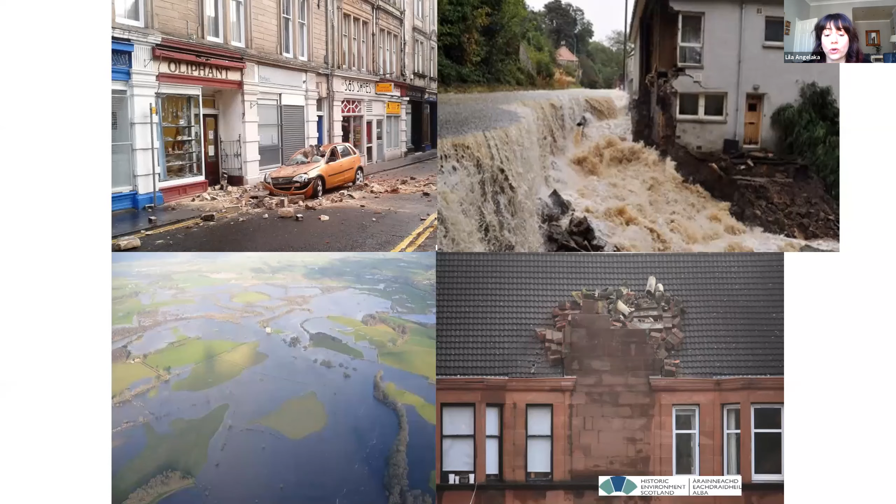In January 2012, there was the highest recorded winds ever in many parts of Scotland. So there is an increasing risk of flooding, caused by storm surges. In some areas there is landslide. So buildings are under threat from coastal erosion and sea level rise, but we're not going to cover this today. However, there is more surface runoff, which is resulting in high moisture levels in external walls or adjacent areas. And that moisture from soils can contaminate porous stone with damaging salts, which can cause decay or accelerate stone decay.

So if we look at the impact on traditional buildings, most of these buildings were actually designed to deal with this weather, and in Scotland, it's quite a harsh climate. So although some of these buildings have functioned perfectly for a long time, with the changing climate, they may not be able to function in the same way. So these buildings may need to be adapted to ensure their long-term survival. And here you can see some of the effects that climate change is causing to these buildings.

It's saturation of masonry and the leaching of lime, which causes instability. And internally, you have higher internal humidity. You have increased growth of algae and vegetation. And again, all of these things, with the ground shrinkage in summer, can cause instability of the soil and the building.

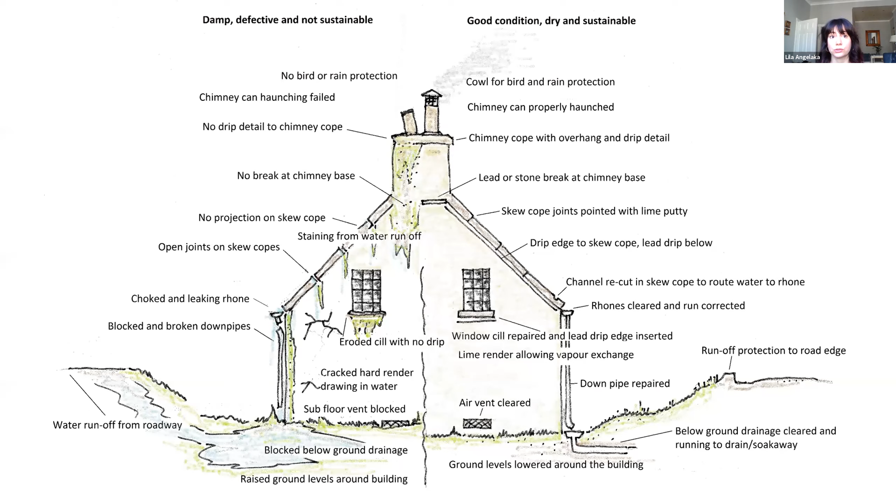Here's a slide we always show in our presentations, just to show basically what maintenance is like, and that maintenance has to come first before thinking about adaptation or doing anything further to the building. The materials we're using in traditional construction, so stone, lime, timber, are quite enduring and are effective in traditional construction, but provided that the building is maintained. Often there is poor maintenance or a backlog of repairs with incorrect materials, poor appreciation of detailing. There's also the difficulty in working heights. So all of these things basically leave the building quite vulnerable to severe weather.

So if we zoom in on the wall, sort of at the micro scale, what does that mean for a building? We're talking about extreme weather events, we're talking about increased precipitation. When older buildings are subjected to high moisture loads through persistent and constant heavy or driving rain, the masonry can get saturated. Damp walls can lead to the leaching of lime, the binder from the wall, which causes instability of the wall, and then the stones can be dislodged. You can see in that nice drawing how the wall basically bulges out.

In addition to this, when you have incompatible materials such as cement renders or hard renders and impervious paints used externally or internally, this can disrupt the necessary movement of moisture going through the wall to dry out. So internally, you have higher relative humidity levels, which can lead to timber decay of the joists, but also of the linings. With additional measures such as insulation and vapor barriers, or blocking natural ventilation, you hinder the drying process, and poor ventilation increases the risk of condensation. So there's risk of mold growth and further timber decay.

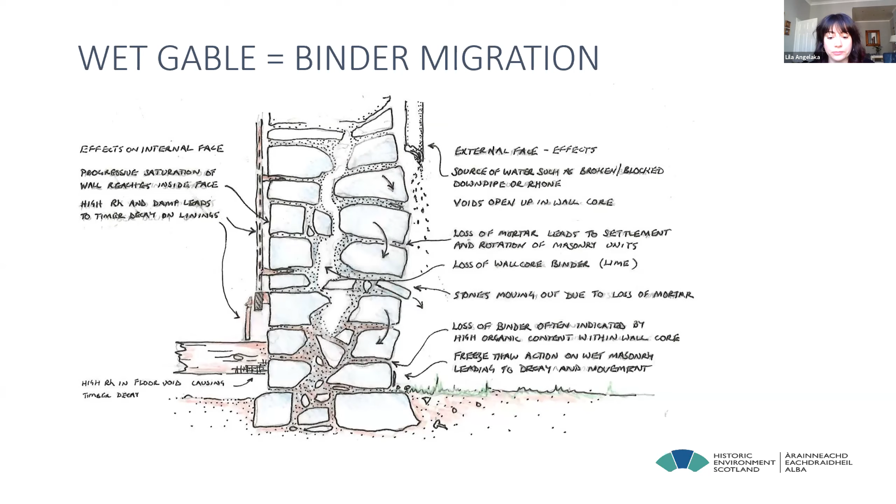So what to do when we're thinking about upgrades? The first thing is to reinstate traditional finishes and also the weather detailing. Generally the focus in today's society and our response to climate change is carbon reduction in housing. So especially older buildings, the ones built before 1919, are considered hard to treat. But in fact, many of these buildings have substantial solid masonry walls, so they actually perform better in terms of energy performance than what we think. With moderate adaptation, they can be considerably improved to have increased energy efficiency to acceptable levels.

So whilst these buildings are, as I said, quite well built, they may need to be adapted to cope with the changing climate, and you may need to adapt their traditional details, or you may need to introduce new ones. But if you do go down that road, these details and materials need to be compatible with the building and match its character. Obviously it's a case-by-case approach. And if your building is listed, or in a conservation area, or a World Heritage Site, you need to think about what that means and the implications in designations.

So I will basically go from top to bottom of the building. I've packed in quite a lot, so apologies, but even if you keep something from all that, that's still quite good.

So chimneys, to start from the top, they're the most exposed element in the building and are quite hard to access. But you do need to check their cans and haunching, the copes and overhang drip. The masonry will be degraded because it's the most exposed element, so you will need to check the mortar joints, and either the stone or brick may need rebuilding. If you do need to rebuild, you need to think of correct materials and correct detailing, having a drip mold if there isn't one.

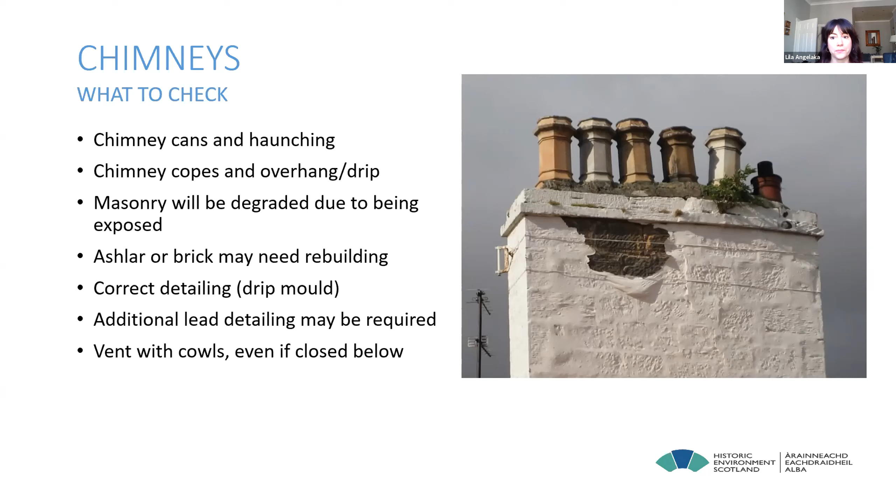If you do need to adapt it, you can use lead to cloak it. And always vent with cowls, even if the fireplace or the flue is closed below, especially if we're talking about tenements where there's a lot of things happening there.

Moving on to skew copes and tabling. This is often a neglected area, and unfortunately also a point of weakness for water penetration. Dampness in gable walls is most commonly due to a combination of factors: defects in chimneys, skews, pointing, and frequently blocked rhones and downpipes. Cement pointing or renders can exacerbate the problem, as cement is vulnerable to cracking, which allows water to come into the building and become trapped.

So you need to look at string courses. You see in that image there's something that looks like a bulge out. It's not a string course, but it's something like that. So you need to check all those details, what there is, if you do need to do anything else.

If there is an overhang, the gables or skews project slightly. If there isn't one and that gable is exposed, you will need to think about redesigning it, or you can put lead underneath following that line of the skew, sort of a string course. Some buildings have skew putts, which you can see in that image, to drive the water away, and also cuts and channels.

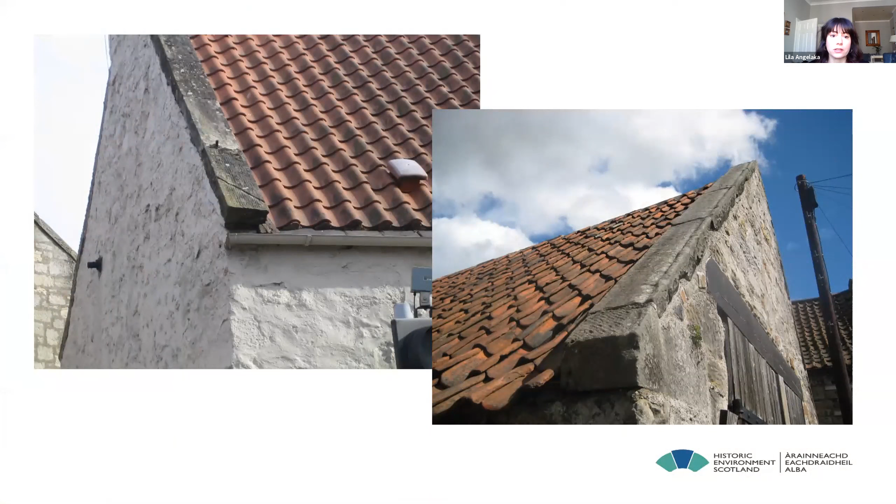Here is the detail I mentioned about the channel cut. You can see on the image to the left the diagonally cut line, meant to direct the water to the slates or to the middle of the next slate or tile, and into the gutter and away from the building. The image to the right has no skew putt, nothing, and is more vulnerable to weather effects.

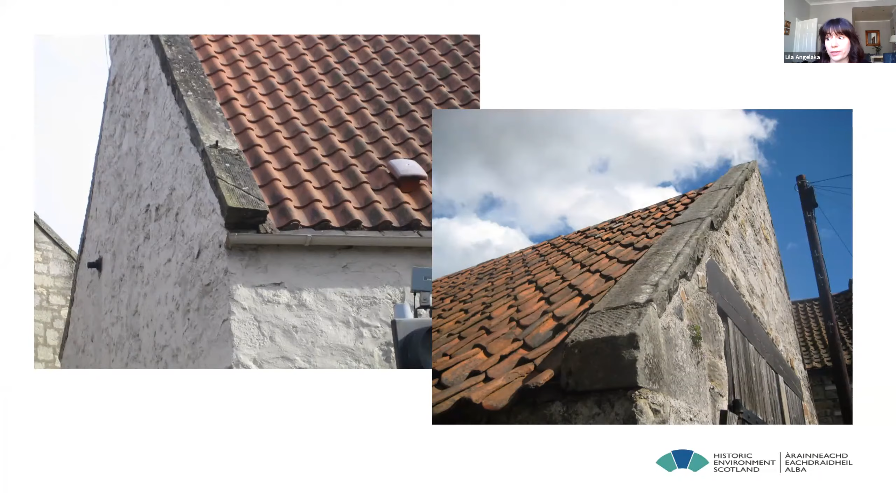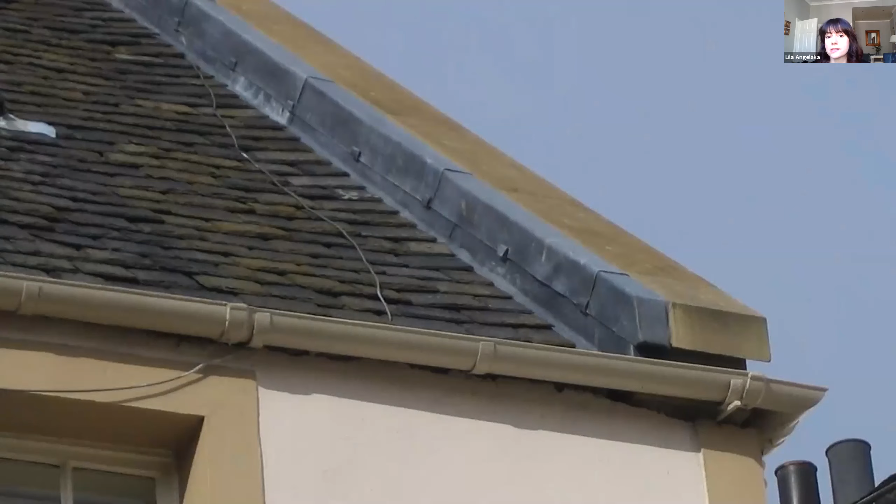This is a halfway approach, kind of between cloaking the whole skew with lead. It's called a secret gutter and half cloaking. A funny story here is lately I've seen quite a few emails and cases in Edinburgh in the New Town where this approach is taken or proposed by roofing contractors. But when the lead turns and goes onto the slates or tiles, it just sits on top of them. It's not secure, so that is not appropriate for use in buildings. It's a very short-term measure because it's going to be easily lifted by the wind.

So as we're talking about roofs, I can talk a little bit about slating. You need to think about whether your slates are appropriate and working okay, and if the laps are correct, or if there are suggestions that they're not. If there is an underlay already and there are mold or damp issues, you need to think about introducing airflow to your roof. Also, in exposed areas or areas of high wind, you need to check fastening, securing the slates with additional cheek nailing every 4th or 6th course. You also need to think about the minimum slate size if you're redressing the slates.

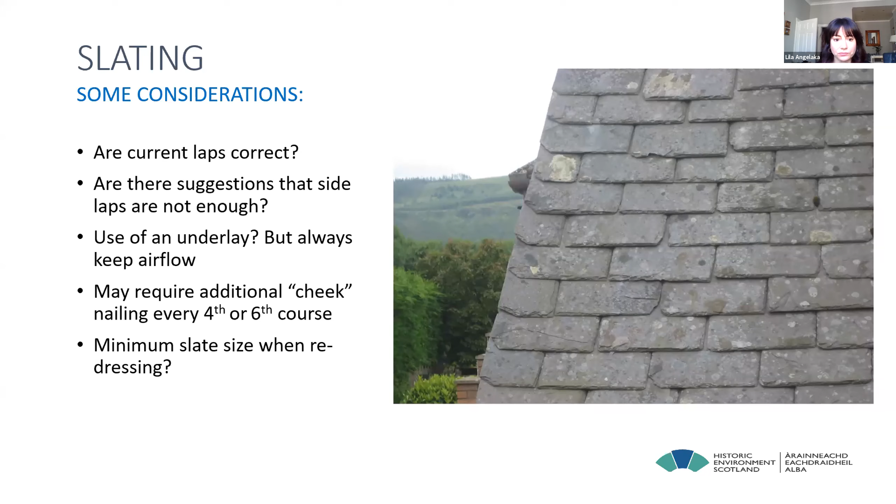So this is a zoomed in image of a roof and shows you how a roof with a water gate, or secret gutter, is done. This is an additional feature for larger volumes of water. Basically you have a lead channel or lead gutter formed at the eaves and then raggled into the skews. The lead goes under the skews, and then slates are dressed over. This is quite durable - it's expensive, but it's a durable approach.

A lot of buildings also have mortar fillets or lead skews, and typically the junction is finished with a weak cement mortar and a lead soaker underneath. This is also an acceptable approach. But anything you do like that, make sure it's fixed properly.

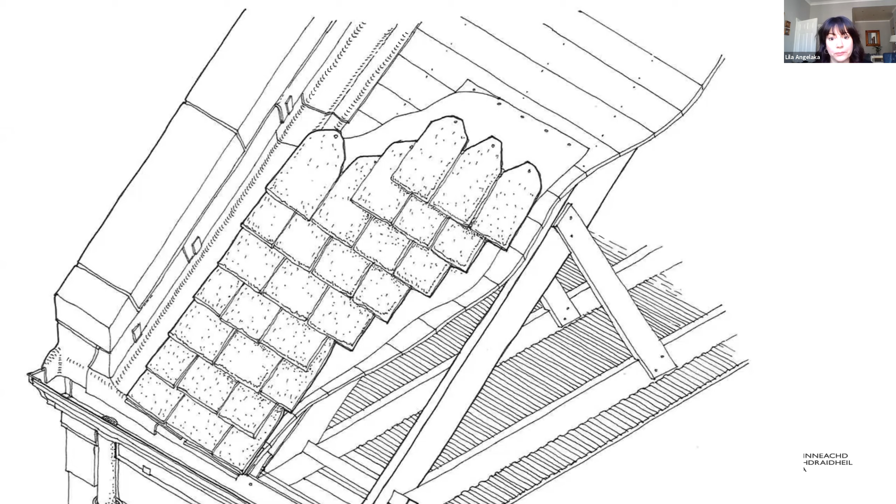And we shouldn't forget about rainwater goods. These should be checked regularly, ideally twice a year, but the reality is that, especially in tenements, that's not very easy to do because of the height. So you should check gutters and downpipes. There's vulnerability to blockages, especially because throughout the years they tend to become smaller. So you may need to replace them with appropriate ones, or think about having wider gutters if they're not coping with the changing climate.

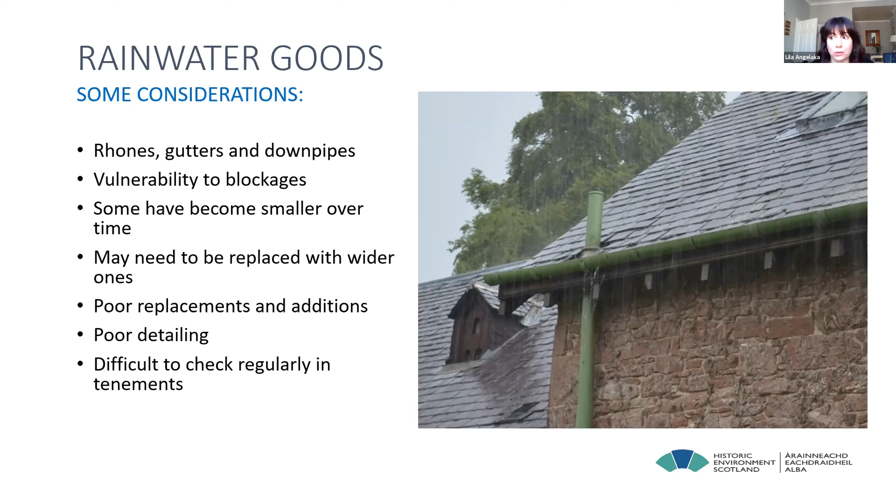Again, there's often poor replacement and additions with poor detailing and connections. Also think about that warmer temperatures and wetter winters, the combination of that may result in increased vegetation growth with potential to block the rainwater goods. This image shows one of these bad connections and bad detailing, and you see all the algae that it has caused to the stonework.

Moving on to the walls. Well, chimneys and skew copes are the things that are most exposed. Walls also matter - even well-maintained masonry walls with good detailing may need additional protection from driving rain. Traditionally, people knew this and understood it. So rubble masonry was commonly protected by a layer of lime harling and a finished coat of lime wash. Rubble work by its nature consists of a high proportion of exposed joints. It's a larger surface, so it was often used on side or rear elevations or in buildings of lower status.

And then these buildings were protected by a lime harl or lime wash. Hard cement-based renders, which used to be a bit more frequent than we would have liked, don't help with water retention, whereas traditional lime, by contrast, is well suited to provide the additional protection you need from wind-driven rain, but it's also quite flexible, so it works better with the building and reduces the instance of hairline cracking. It works with the building when the building is moving for any reason, while the open pore structure of lime harling allows water vapor dispersal and prevents moisture buildup in a masonry wall.

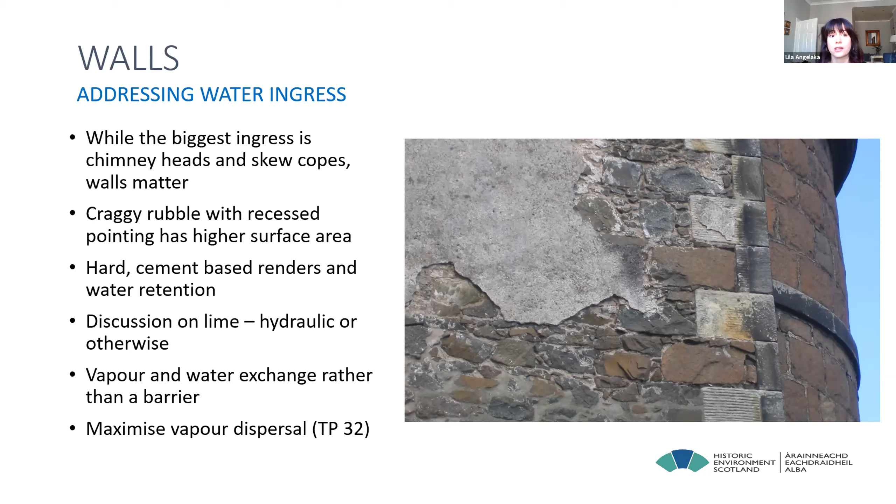So moving on to the walls, basically, historic evidence shows that most buildings were actually covered with a lime harl and a lime wash. Reinstatement of external coatings has proven to be an effective approach in managing the effects of wind-driven rain, even in exposed locations. We have actually done a refurbishment case study of a building in Shetland, which was quite exposed. Traditionally, it wouldn't have had any harling, but there were ongoing issues, so we introduced the harling, and so far it's performing well. That's another thing to think about.

And when you are doing this, you also need to think about - it's an opportunity to think about external wall insulation that you wouldn't have had in other cases.

And again, we shouldn't forget about other kinds of detailing. Often parapets and cornices are considered architectural details, but they're not just that - they're highly functioning elements of a building, so their role is not fully appreciated. The highest part of the building, parapets are one of the most exposed elements, and in areas of high exposure, you may need to think about remodeling these parapets. You can see here how the rain is driven onto parapets, sills and cornices.

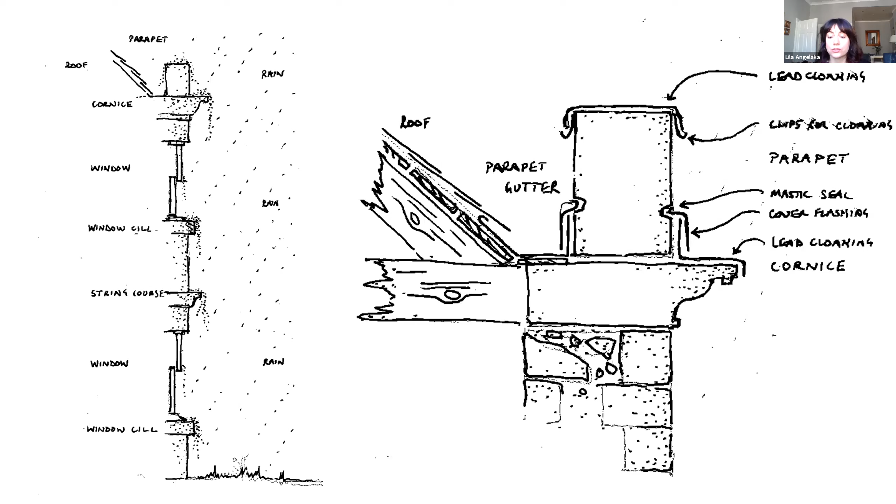Below ground drainage, that's another long topic, but I'm just going to roll through it. So as rainfall levels increase, solid ground floors may be vulnerable to wetting, and raised water tables, water runoff from adjacent areas, and splashback of water onto the building. All these can cause problems.

But the drainage itself also should be adequately managed to ensure that water is running effectively and being dispersed away from the structure, for example through the formation of gullies or drainage pipes below ground.

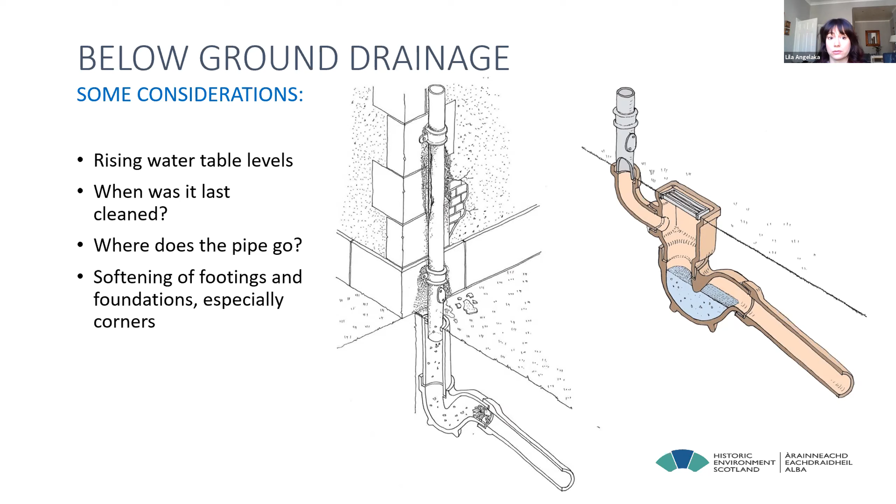Methods such as tanking are not really advisable, because they usually lead to trapping the moisture in the structure, and then it moves up to the walls.

Now, internally, what does it all mean? Basically, with the changing climatic conditions and the high precipitation and saturation of walls, this results in higher levels of moisture in the air and inside the building.

So there's a greater risk of condensation, which can give rise to mold, timber decay, and insect attack to structural timbers, but also to your furniture and your walls, depending on how bad it is.

Measures designed to address energy efficiency, like insulation, sometimes cause too much airtightness. And increased airtightness is linked to elevated levels of CO2 and other pollutants, which has a detrimental effect on the occupant's health, but also the health of the building.

So you need to think about the conditions you have in your building, and one of the best things to do is to have adequate ventilation, to air your space, but also background warmth. The combination of that helps a lot with those issues, but also buffers internal conditions.

With the right finishes—in areas, for example, where you have minor moisture ingress—if you use the correct internal lime plaster applied directly onto the existing masonry and finished with a breathable coating such as limewash or clay paint, that actually helps a lot.

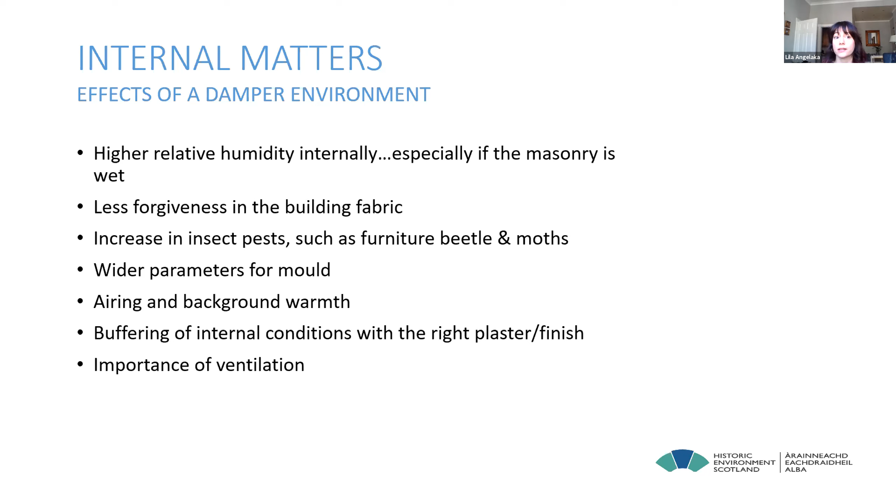Modern stain blocking or mold resistant paints don't really work. They can inhibit the passage of moisture and should not be used in areas of high moisture load.

Somewhere between drainage and ground levels, when you're thinking about ventilation, you need to make sure what's happening also at the lower level.

So any ground levels should be checked, and if they have been raised over time, they need to be lowered if that is the case. You also need to make sure that all your vents are free and unobstructed, and that the air is flowing into your building as it should be.

Also, often things such as pavements and hard landscaping that are butting against a traditional building have not been detailed properly, and that causes issues to the building.

All of those things are basically written in our adaptation guide, which is the short guide 11 that you see, the red one.

To summarize, there are three things to think about: keep your building well maintained and in a good state of repair; you may need to reinstate traditional detailing or enhance your building with new detailing that matches the character of the building; and you may need to improve surface drainage around your building.

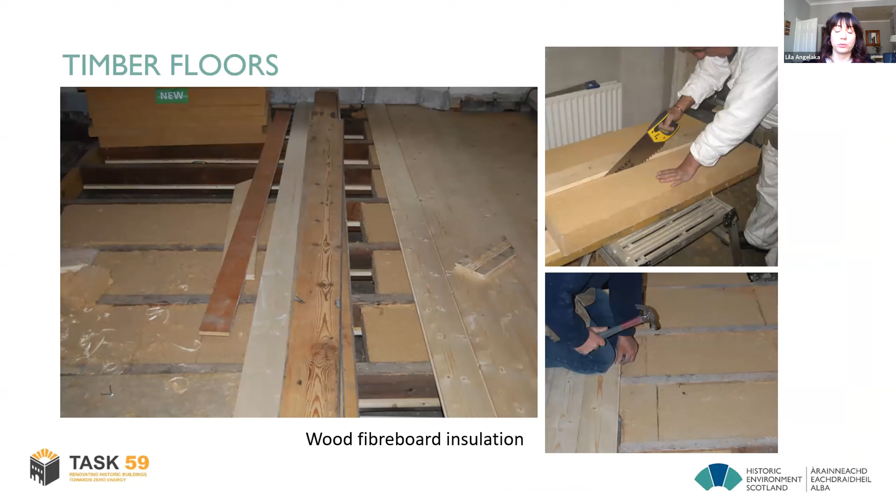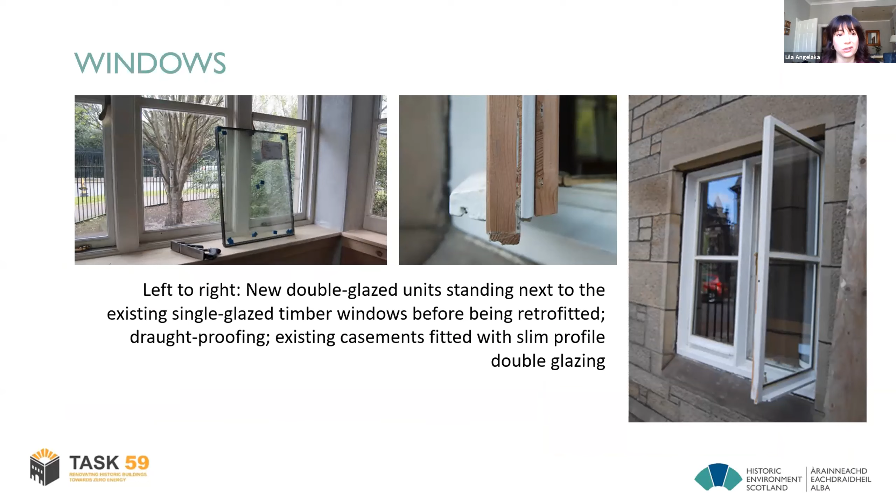So there were a lot of repairs from the 80s and 90s. We stripped some of them out, tried to reuse anything we could. We insulated the floors with wood fiber board insulation, which is a breathable material. We used new double glazed units fitted into the existing timber windows because they were of good quality. But we also used draught proofing.

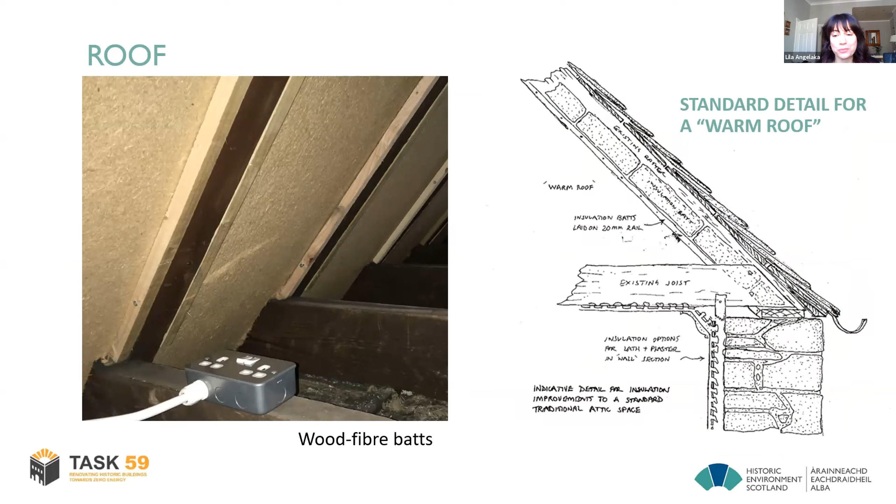We used wood fiber boards to insulate the roof, but we created a warm roof and a cold roof. It could be a whole new presentation talking about this. Not forgetting the cooms, which are very common in Scotland. They're quite a hard area to insulate, so we have written up how we did that. We insulated the doors with aerogel, which is quite thin and suitable for places like this, such as doors.

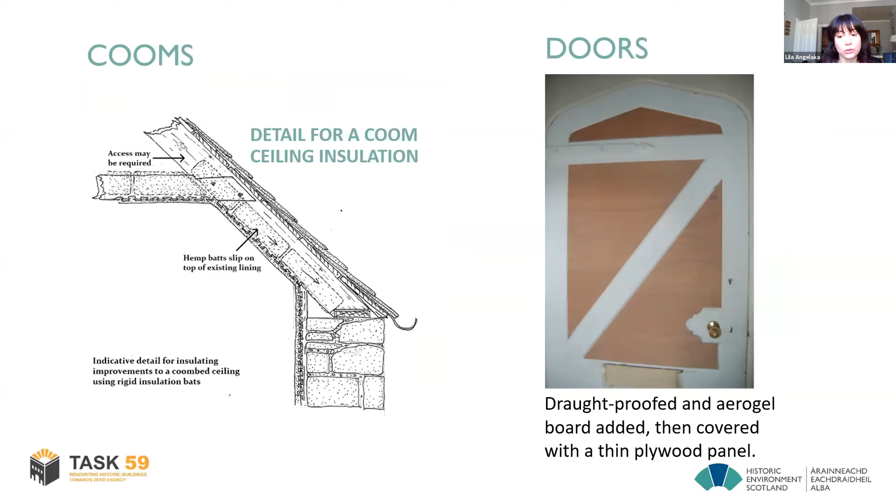And we insulated the walls with blown cellulose fiber. This goes between the stone masonry and the lath plaster. And you can see in the panels we created throughout the lodge, you can actually view these interventions or measures by having these viewing panels.

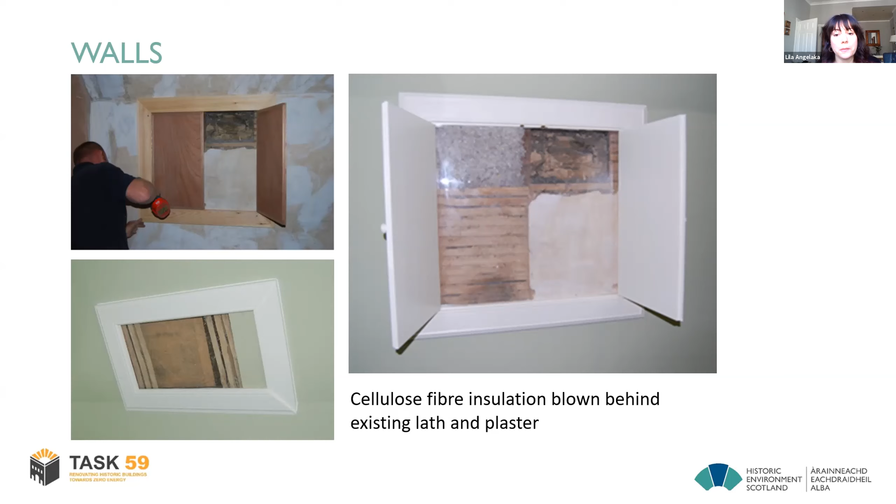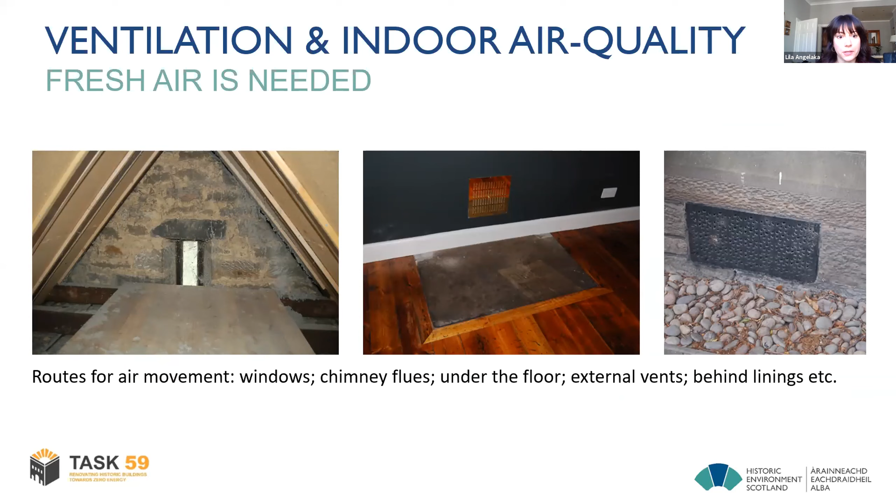All these materials are breathable and work well with a building of that age and of that construction, but we shouldn't forget about ventilation. And here we tried to reinstate any ventilation that was blocked and any airflow that was obstructed by clearing vents and reopening windows.

And this building is a bit of a success story for us because it went from band F to recently band C. And it shows you that a traditional building can actually be retrofitted to meet the new energy standards, and that doesn't have to have a detrimental effect on the building. At the moment, we're also in the process of putting in some renewables, probably an air source heat pump somewhere, and insulating some difficult areas such as the top of bay windows with hemp insulation to trial it.

Forgot to say that we've done a lot of monitoring on this, so we actually have evidence to present how these materials and measures have worked on the building. And that is the case study that you can read some of, but we're also writing a technical paper which is specifically on the monitoring. So apologies, that was a lot of content, but thank you very much for listening to me.

Thank you so much, Lila. That was a lot of food for thought. I will pass on now to Jan, please. Thanks, Gabby. I'm going to share my presentation. Oh, I think we just need to stop sharing. Thanks, lovely. So now I'm going to share the presentation with you.

Okay, that's all good. So my name is Jan Grangira. I'm Climate Change Manager with Edinburgh World Heritage, and today I'm going to present the Canongate Housing Energy Efficiency and Conservation Project. But before we start the presentation, I would like to introduce you to Edinburgh World Heritage Trust. We are an independent charity in charge of the management of the World Heritage Site in partnership with Historic Environment Scotland and the City of Edinburgh Council.

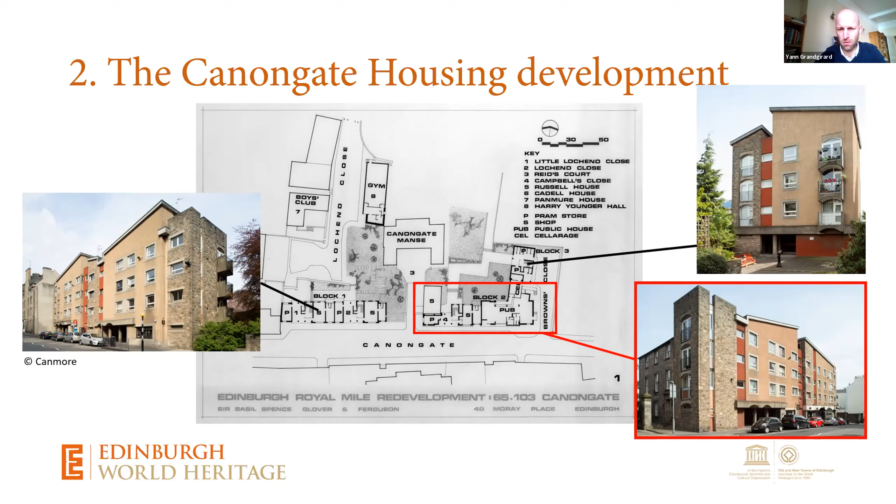And we've decided to work on block 2. You can see at the bottom on the right-hand side, a block composed of 12 flats and 2 commercial units at the bottom, with a total of 11 owners. There were a couple of issues in terms of repair and maintenance across the development, and you can see a couple of examples on the photos with concrete spalling, moss issues and staining, and also structural cracks on the right-hand side.

There were also a couple of issues in terms of energy performance and internal comfort, with insignificant, almost no insulation in the building. There were single glazed windows. There was lots of thermal bridging due to the original design, inefficient or no heating system in one case, and mold, ventilation and condensation issues.

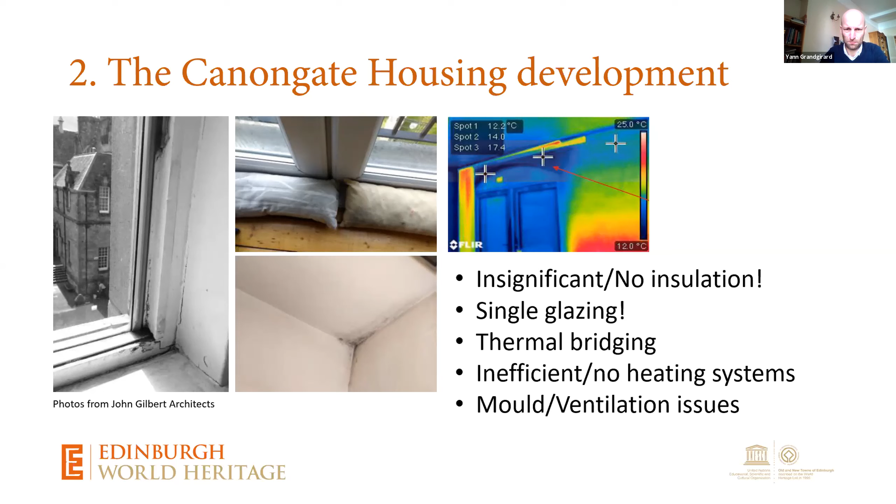So now let's have a look at the delivery model, and let's start with the community engagement aspect of it. We had to face a couple of challenges to implement the project at the very start. There was no legal entity for the owners to manage the building and carry out repairs. There was also some legal complexity in relation to the title deeds, so these are the ownership titles for the properties. And as a result, implementing communal decisions was quite complicated from a legal perspective.

When we started the project, we didn't know exactly the cost for the works and how they would be covered, which obviously was quite a challenge when securing and maintaining flat and business owners' involvement in the project, especially at the very start.

To address these problems, we've implemented a couple of strategies and solutions. And first, we used our conservation funding program methodology, which is aiming at helping owners to get organized and form a committee to manage the project and the works. We've been giving them advice and support throughout the whole process on various aspects, and we also provided funding to cover the conservation work. So the conservation funding program, basically.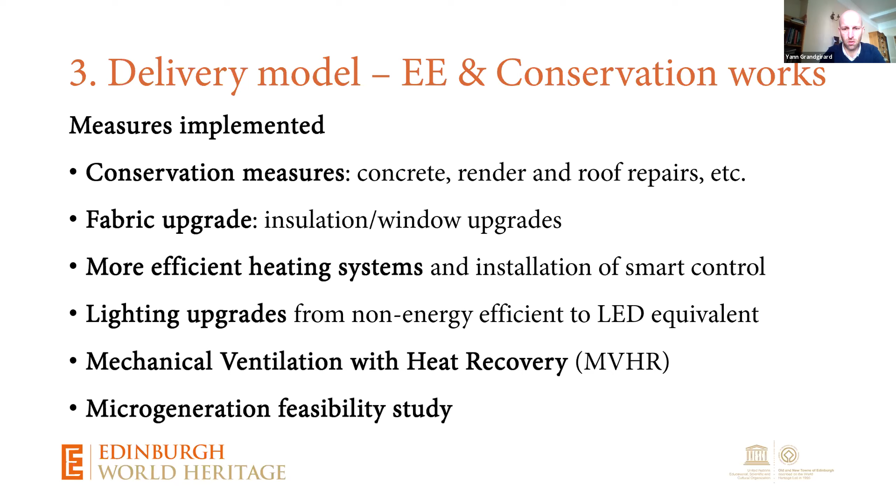We installed more efficient heating systems in some instances, and in all the flats we've installed smart controls for the heating systems. There were some lighting upgrades with LED systems. There was some mechanical ventilation with heat recovery installed in all the flats and in one commercial unit. And the design team carried out a micro-generation feasibility study to understand what type of net zero or low carbon heating system could be implemented in the building.

So these are the windows, and it's interesting to see on the left-hand side one of the remaining original windows that was in the building, and on the right-hand side the new bespoke windows with double glazing that we installed.

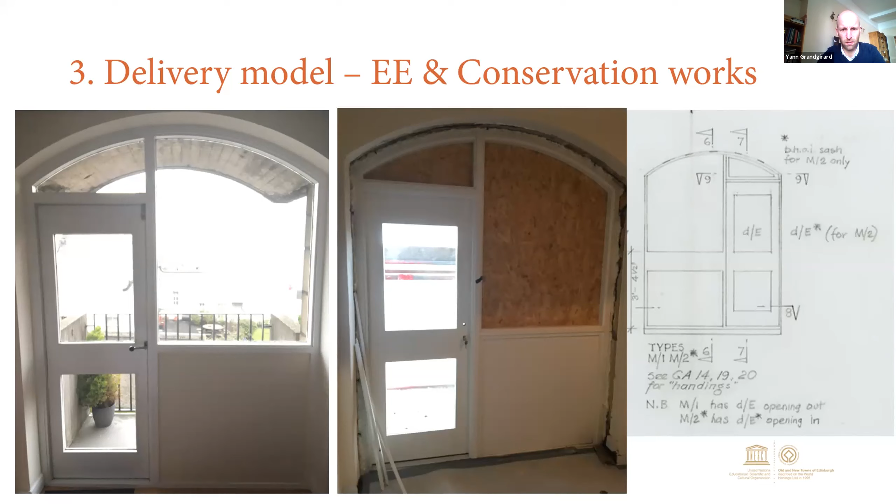Another example with one prominent element of the building: the balcony windows. On the left-hand side, the original single glazed window; in the middle, the new window; and on the right-hand side, an original drawing from Basil Spence practice. The idea is to mimic exactly the original details while improving the performance of the glazing.

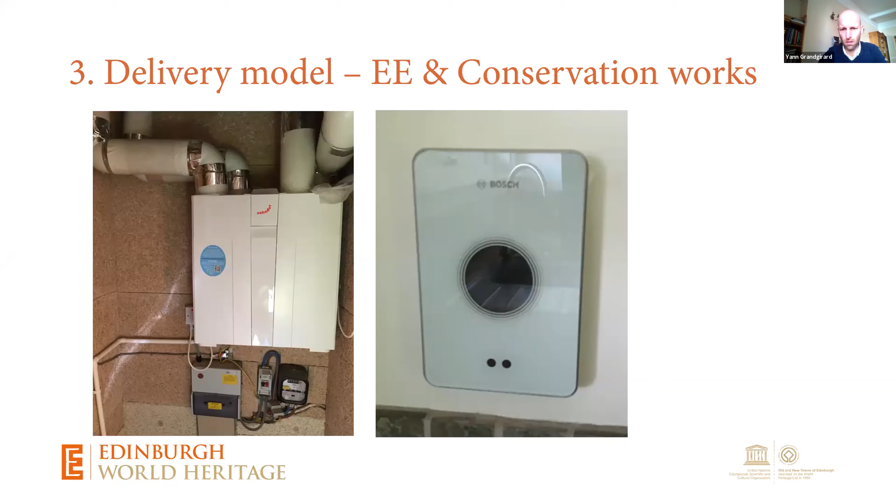These are some energy efficiency measures. On the left-hand side, you can see a MVHR system, mechanical ventilation with heat recovery. On the right-hand side, a smart control for the heating systems that you can control with your mobile phone.

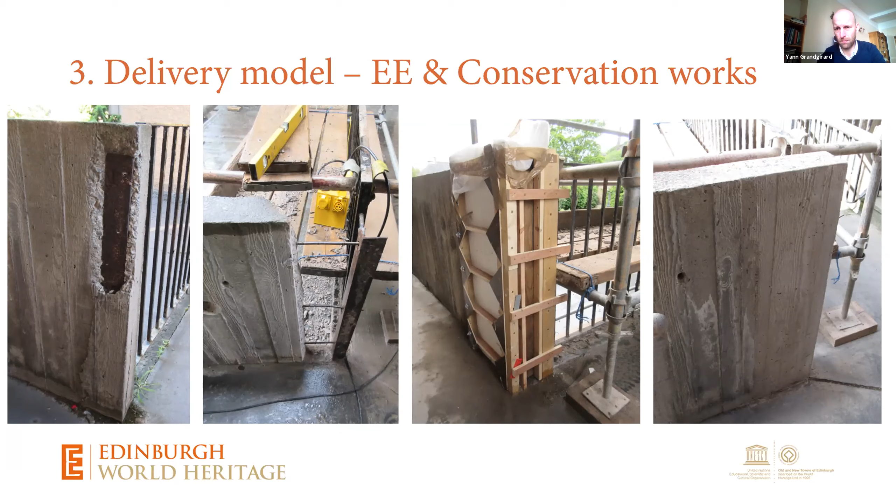An important part of the works consisted in repairing the concrete elements of the building, which were also very important in terms of architectural significance. That was quite tricky because you need to do it very carefully using specific techniques. From left to right, you can see the process: the concrete spalling, the breakout of the concrete element, the cast, and then the repaired concrete balustrade, with specific attention to reinstating the timber shuttering marks, which are really part of the character of the concrete elements in the building.

Now let's talk about the social and technical monitoring. That was a requirement from the Scottish government in this project, carried out before and after the installation of the measures. The principle was for us to recruit volunteers amongst the owners, who had the possibility to opt out at any point during the monitoring. We had a sample of 5 flats and 2 commercial units. Social monitoring consisted of questionnaires done face-to-face, and technical monitoring in the installation of monitoring devices.

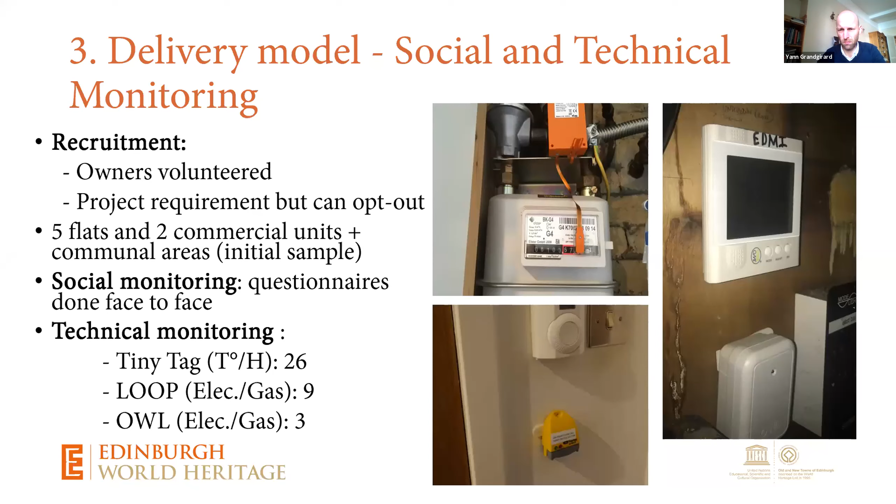We had three types of devices. The tiny tags, at the bottom left, that we used to monitor temperature and humidity in the flats—we have 26 of them installed in the flats and communal areas. And also LOOPs and OWLs, shown top left and on the right-hand side, that we used to monitor electricity and gas consumption in the flats and commercial units.

Now I would like to share with you some figures about the expected improvement in the buildings, based on calculations carried out by the design team. We expect a decrease of 66% of carbon emissions as a result of the works, a decrease of 73% of energy consumption in the building, and a reduction of 51% of fuel bills, representing savings on the energy bills for the residents.

A final element of the delivery model is the energy efficiency advice and on-site support. Throughout the project, we organized events and workshops to build capacity amongst the owners on different subjects, such as maintenance, energy efficiency advice, and energy behavior. This month we'll have a workshop: the design team is organizing a session to provide training on the equipment installed in the building, including the MVHR system and the smart control for the heating systems.

We also managed to use the project's progress and results as a source to build capacity for the owners during our meetings with them, and we used different partnerships with national stakeholders such as Home Energy Scotland and Resource Efficient Scotland to deliver the workshops.

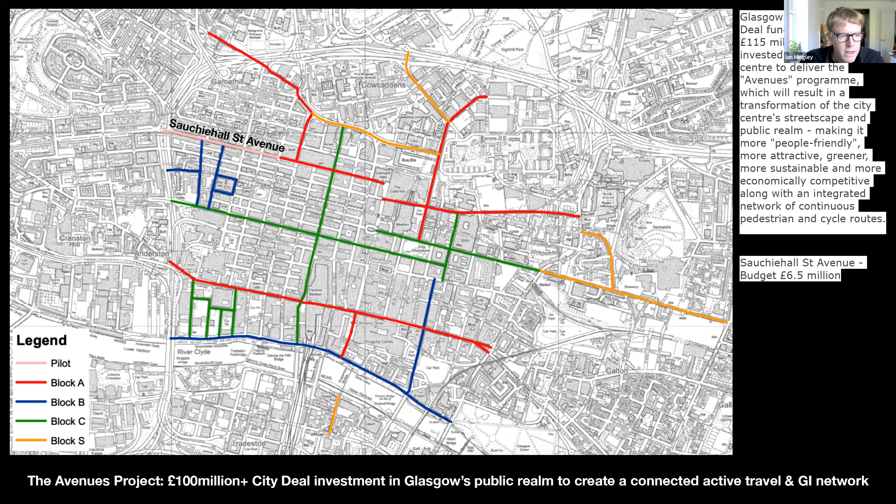The whole of the city centre of Glasgow is virtually a conservation area. The top left, you can see the little purple dots indicate where Sauchiehall Street is, or where the part of Sauchiehall Street that we're dealing with is.

Not just the movement of carriages, as the word suggests, but you got a lot of pedestrians, cyclists, and other motorized forms start to come in as well with the trolley buses. In the 20th century, the street...

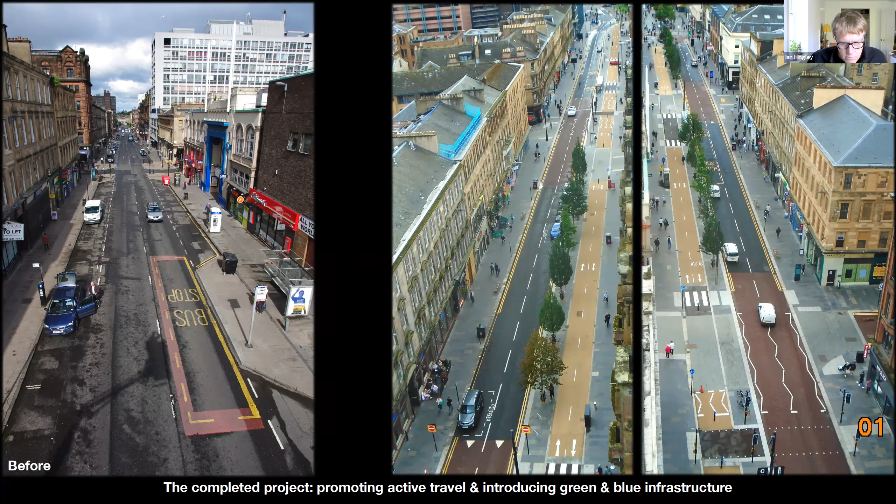So there's a picture at sort of ground level of the scheme from last year, so you can see these components in operation. We still, I was talking before about the space we created to get the cycle lanes and the tree planting was generated by essentially removing the parking and narrowing the carriageway by half.

The car on the right, for instance, is within a disabled bay, and there's still loading on the street. So all those activities that are necessary are still accommodated within the scheme. It was just that the parking was removed to give us the space essentially to put in these new facilities.

Simple, again, it really is so simple. All we did is we made the footway slightly wider. We put the trees down in the middle of the street, principally because that was the space where there were least utilities. We put a cycle lane on the inside of the trees so they were protected from motor vehicle activity. It's all within Glasgow city centre, which is within this very formal grid, so everything is just long and straight. We stuck to that overriding structure.